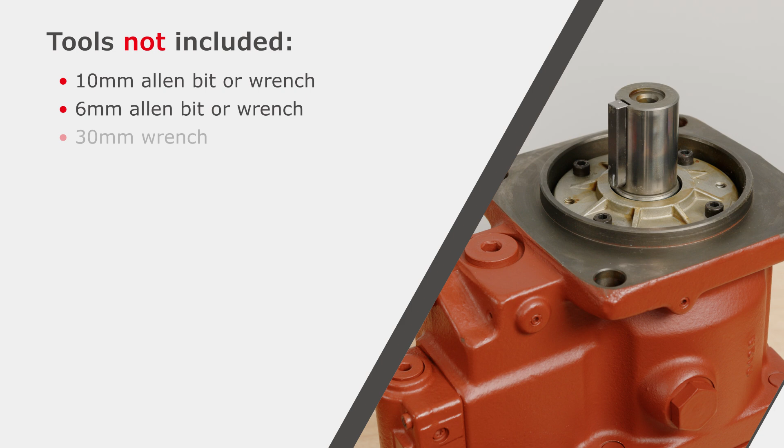Welcome to the Kawasaki K3VL drive shaft removal and installation video. As always, please use caution when following this procedure. Safety glasses are recommended. Please note that failure to follow these instructions could result in hydraulic fluid leaking from the pump or other malfunctions. In this procedure, we will be replacing the input shaft on a K3VL pump. To complete this procedure, you will need the tools listed.

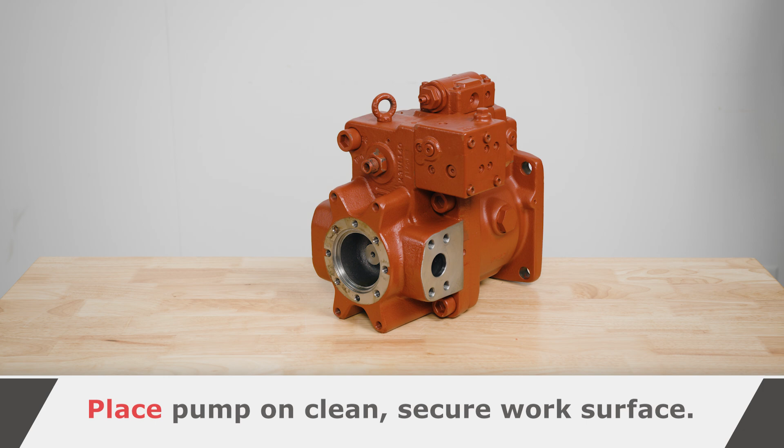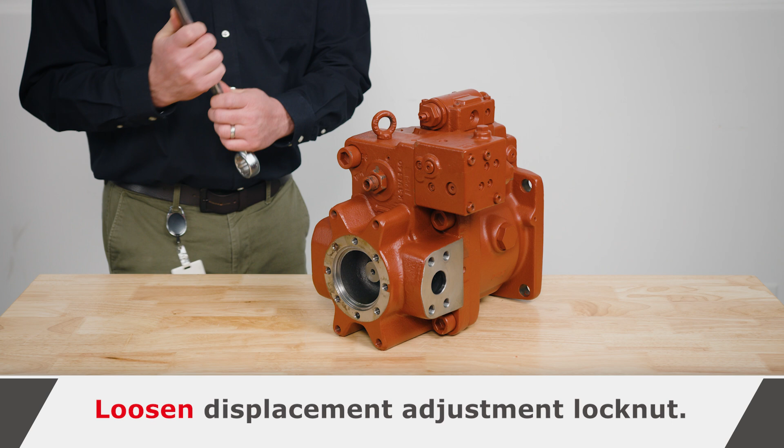Begin by placing the pump on a clean, secure work surface. Locate the displacement adjuster screw and measure the exposed thread length. Note the length. Use a 30 mm wrench to loosen the displacement adjuster lock nut. Use a 10 mm Allen bit or wrench to hold the adjuster screw in place while further loosening the lock nut by hand, being careful not to remove the lock nut from the adjustment threads.

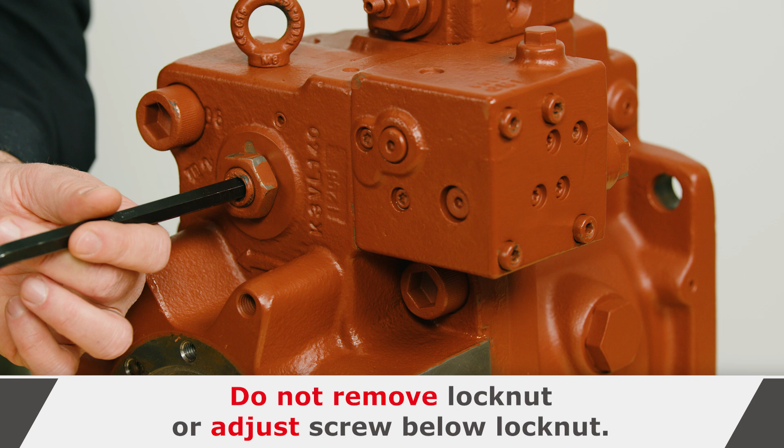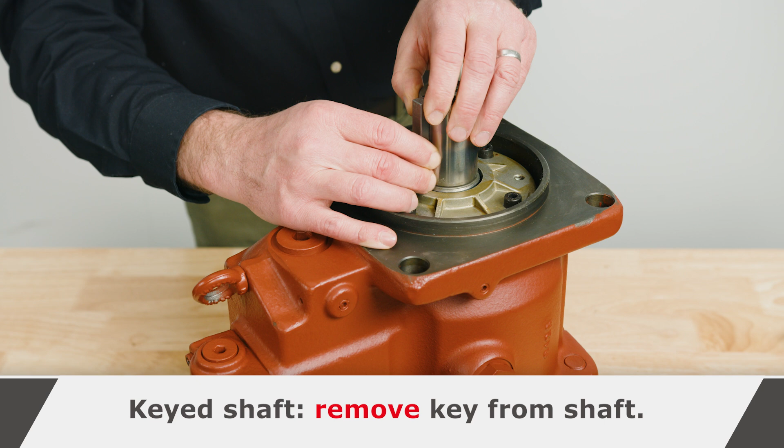Then turn the adjuster screw clockwise, being careful not to adjust the screw below the lock nut, as this may dislodge the internal stopper plug. Orient the pump vertically on the work surface. If you have a keyed shaft, remove the key from the shaft. Wrap the shaft with masking tape to prevent damaging the shaft seal when removing the seal carrier.

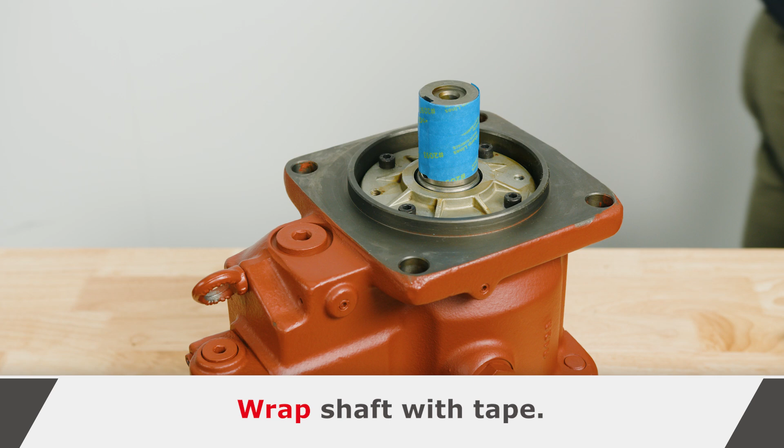Use a 6 mm Allen bit or wrench to remove the 4 socket head cap screws from the seal carrier.

To assist with removing the seal carrier, thread 2 6 mm socket head cap screws into the jacking holes. Remove the seal carrier by grasping the screws, making sure to avoid touching the shaft. Remove the O-ring from the pump and place it back in the seal carrier. If you have a keyed shaft, insert a bolt or lifting eye into the threaded hole of the shaft.

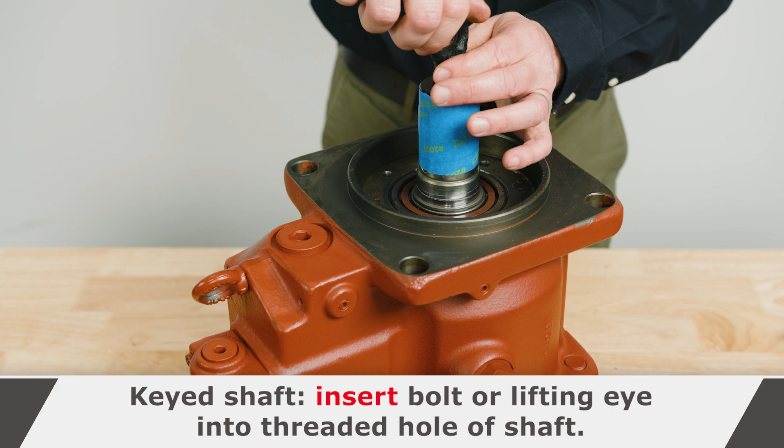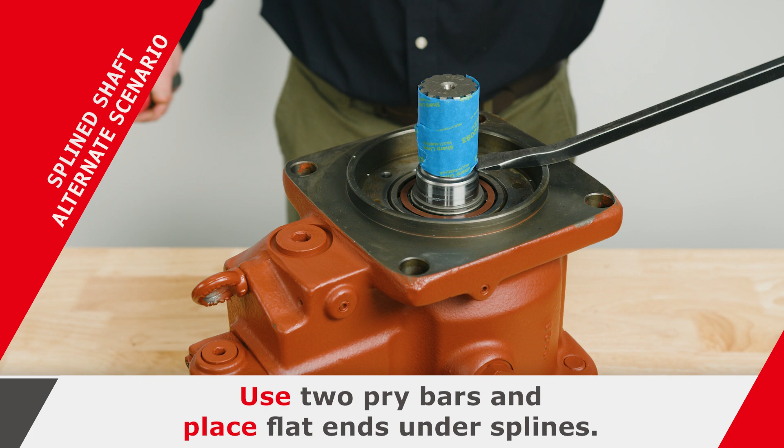Using a slide hammer, grasp the pump shaft with one hand and, using the other hand, operate the slide hammer and pull up on the shaft, maintaining constant pressure until the shaft is removed. If the shaft is splined, use 2 pry bars and place the flat end under the splines. Gently and evenly pry the shaft and bearing out. Once released, grasp the shaft and bearing and remove.

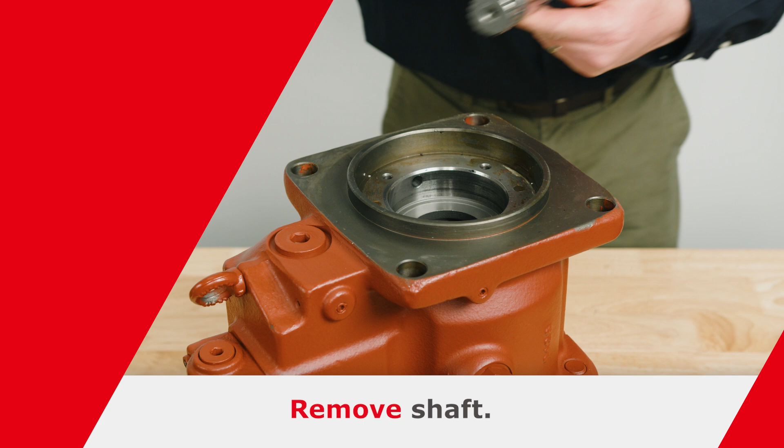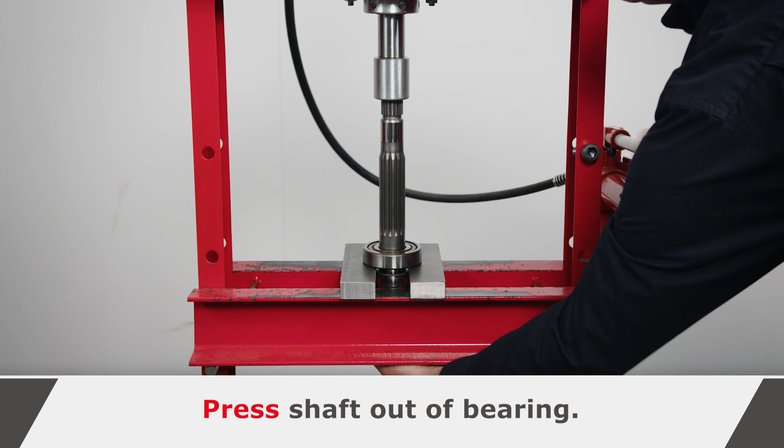Secure the shaft and remove the snap ring using a snap ring pliers. Remove the bearing spacer and set aside. Press the shaft out of the bearing and set aside. Remove the bearing washer and set aside. Note the orientation.

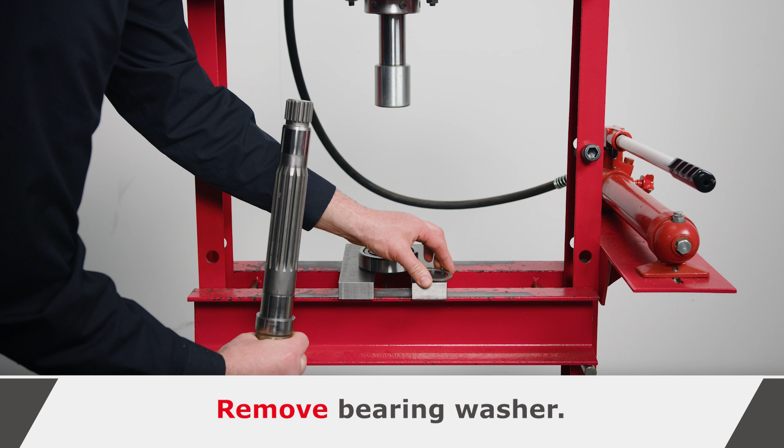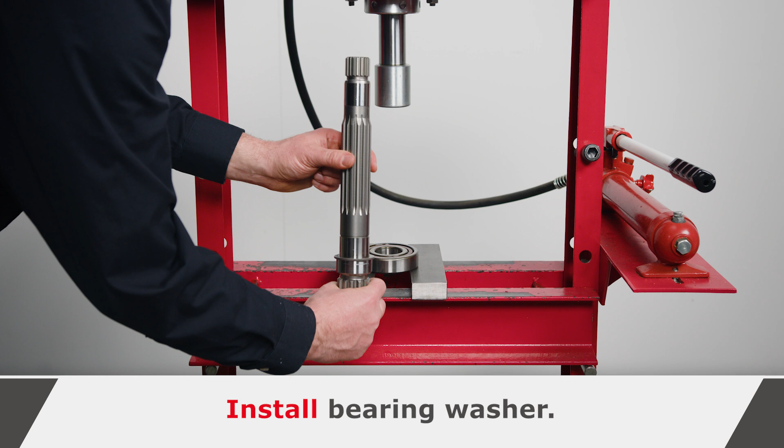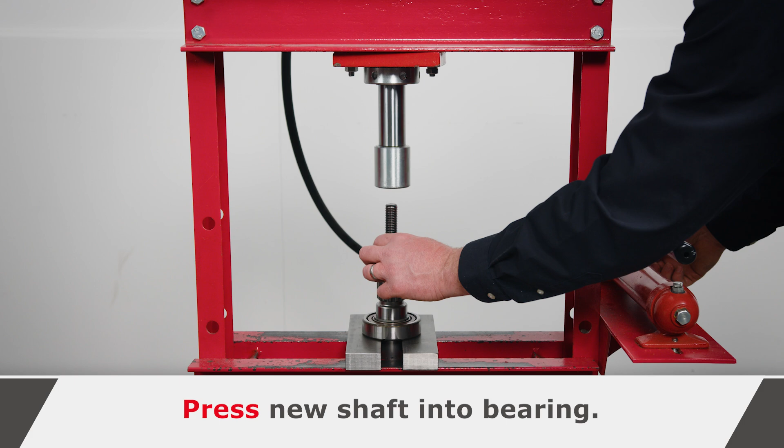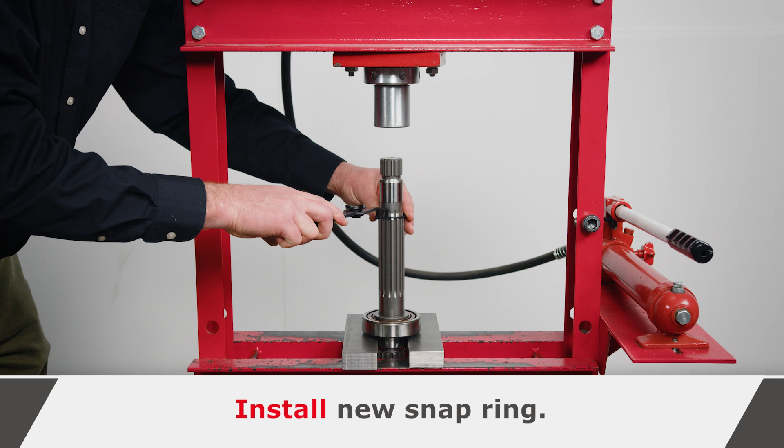For the replacement shaft, install the bearing washer in the same orientation. Flip the bearing over on the press before installing the new shaft. Press the new shaft into the bearing. Reorient the shaft. Reinstall the bearing spacer that was previously set aside. Install a new snap ring and ensure it is fully seated. The replacement shaft assembly is now ready to be installed in the pump.

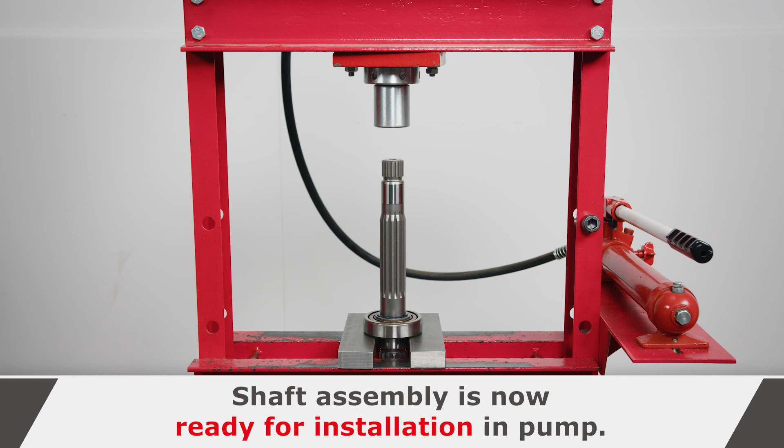Install the replacement shaft by carefully aligning the shaft splines with the cylinder. Use a rubber mallet to gently tap the end of the replacement shaft assembly until it is fully seated, applying a minimal amount of force in order not to crack the set plate. Wrap the end of the shaft in tape before installing the seal carrier.

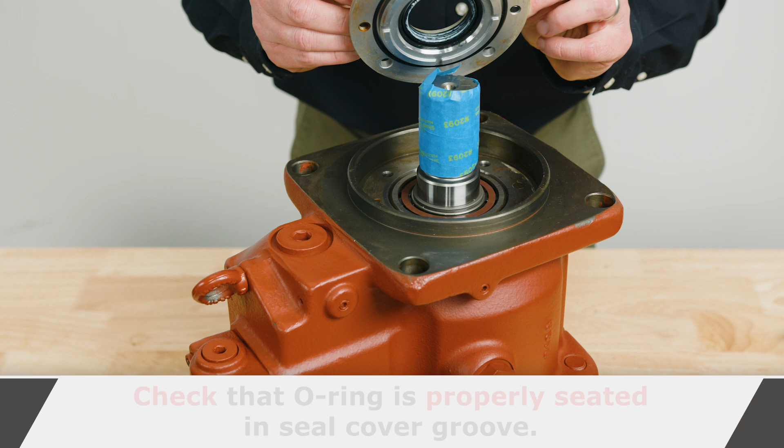Ensure that the O-ring is properly seated in the seal cover groove before installing. Gently slide the seal carrier over the shaft, being careful not to touch the shaft. A slight twisting motion may be needed to align the mounting holes. Thread the 4 socket head cap screws back into the seal cover. Torque to 22 foot-pounds.

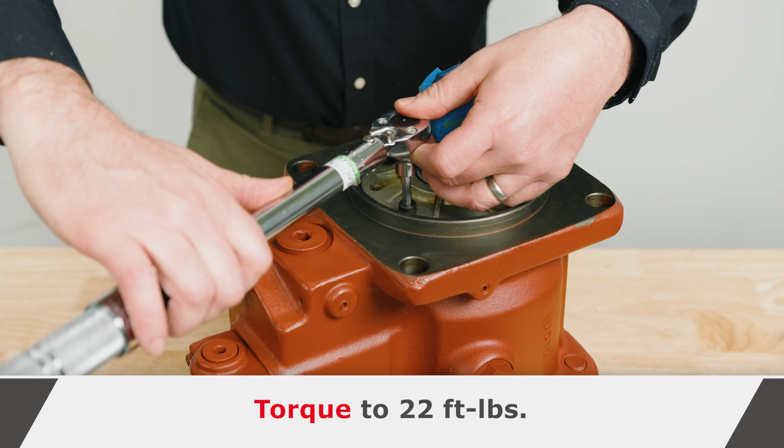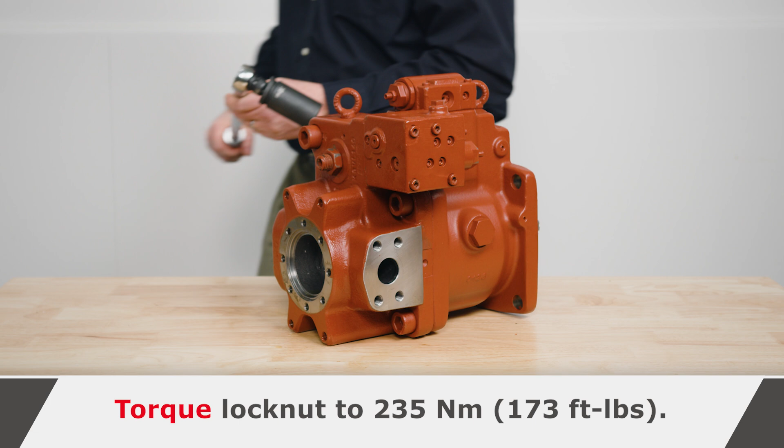Remove the tape from the shaft. Restore the displacement adjustment screw and lock nut to its previous noted dimensions. Torque the displacement lock nut to 235 Newton meters or 173 foot-pounds. The pump is now ready to be used in a new application.